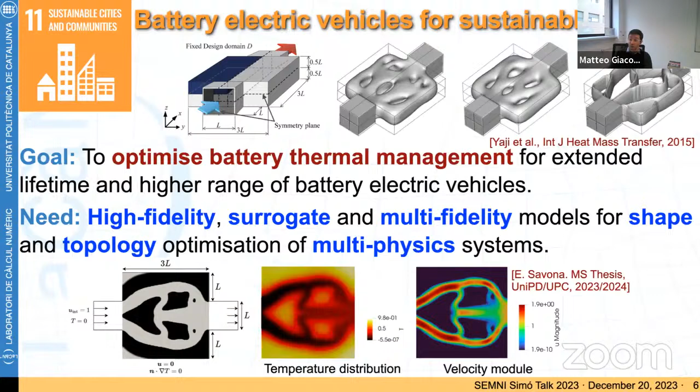The other problem that I mentioned earlier, related to extreme events, has in mind Sustainable Development Goal number 6 about clean water and sanitation. In presence of extreme events like floods and hurricanes, the critical infrastructure that we use in our daily life, like pipelines or sewage systems, can be critically affected. So in those cases, how can we provide feasible, deployable manners to have access to clean and safe water? To do this, what we can deploy are filtration systems or microfiltration systems. The key aspect of these systems is that they need to be easily transportable. They need to be efficient in terms of energy consumption.

And so they have a lot of restrictions that make these devices not something that can be simply set down in a certain place; we need to be able to move them easily. So it's critical in this context to devise digital twins of these membrane filtration systems to perform optimization, again, shape optimization and topology optimization, but also control in real time of these devices.

And the challenges in this context are the fact that the underlying physics is represented by coupled systems, Navier-Stokes, porous media, and so on and so forth. And there we need effective domain decomposition techniques that are also able to treat not only the high fidelity simulation, but also the local surrogate models that are constructed in each subdomain. And this is what we started looking into with the group in Loughborough recently.

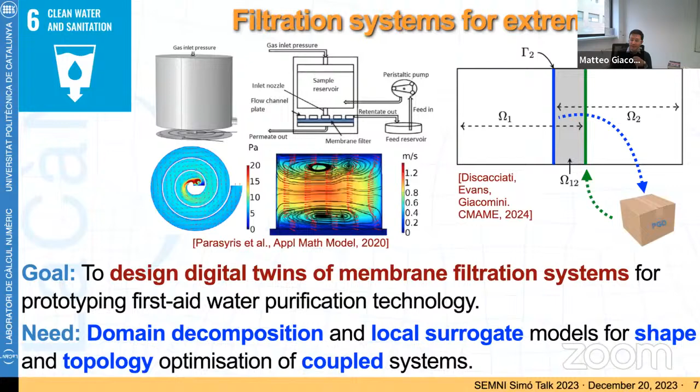So these are the two main motivations of all the work that I'm going to present today. But for the sake of simplicity, I will try to stick to a bit more abstract framework and talk about structure optimization henceforth. So what is topology optimization in a nutshell? Here you see the abstract mathematical formulation of the method.

The idea is that we want to determine the layout of the domain. By the layout, we mean the material distribution that we have in this big box. This material distribution needs to meet a certain criterion. So we want to minimize a certain cost functional represented in blue over here. And this cost functional, of course, depends on the shape of the domain, but it can also depend on some physical variables, for example, this U. And this physical variable U, generally speaking, is the solution of a certain PDE.

In this context, we are going to consider the linear elasticity equation. So this will be the standard linear elastic problem. But this is not all. We also need to introduce additional constraints, which are geometric constraints. Okay. This result here to the right is the compliance minimization of a bridge in which we are applying a vertical load in this position.

Okay, so what are the computational challenges in this context? Well, as I mentioned earlier, this objective functional depends upon the solution of a PDE. So we need to solve a PDE multiple times using finite elements. Moreover, these problems are generally ill-posed in the sense that there exists no unique minimizer. There are multiple minimizers, for which we need to introduce geometric constraints, which could be constraints over the volume, constraints over the perimeter.

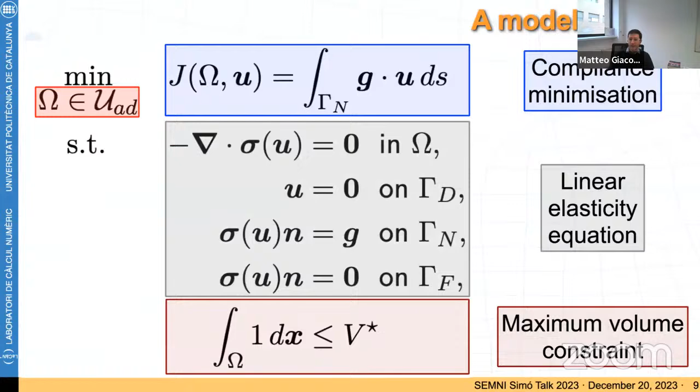Okay. So in the literature, there have been many ways of approximating this problem. And what I want to start with is briefly reviewing the homogenization method. The idea of homogenization goes back to the work of Bendsøe and Kikuchi, and was later formalized mathematically by Allaire. The idea of topology optimization by homogenization is to define a composite material. This composite material is characterized by two variables, a material density theta, and what is called a homogenized tensor C star. So we can rewrite our original compliance minimization problem using the homogenization method by employing these two variables, the material density and the homogenized tensor.

So what is critical is to rewrite all the functionals and all the variables that are appearing in this problem in terms of theta and C star. Of course, in terms of the constraint over the domain, it's straightforward to see that basically it boils down to rewriting the integral only accounting for theta. Theta is a variable that is equal to 0 in the void and equal to 1 in the material.

Okay. We can rewrite the compliance using the dual complementary energy principle in terms of the Cauchy stress tensor and the homogenized tensor C star. And what is most important, we need to determine a constitutive law to express the stress tensor as a function of the displacement using the homogenized tensor. So in this framework, what we basically have done is determining a way to express this domain omega in terms of these two parameters, theta and C star.

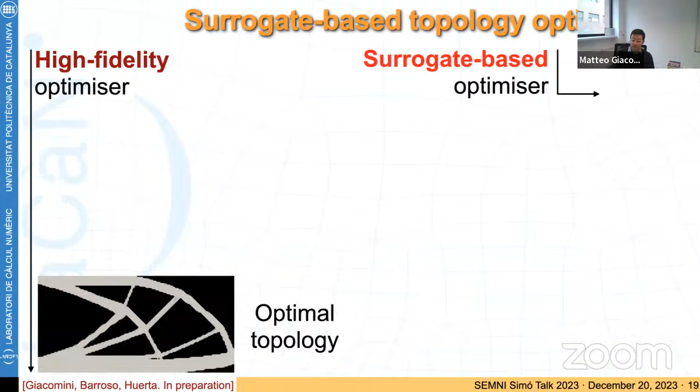So using this, instead of solving the entire high fidelity optimization loop, to provide a surrogate-based initialization to the algorithm, we can retrieve an optimal topology, which is indeed much more reasonable in terms of its mechanical configuration, and also the major features from the high fidelity solution to the left and the surrogate-based optimization to the right are actually well captured.

If you look more quantitatively to the compliance and the volume, we see that there's approximately an error of 10% with respect to the high fidelity solution. But again, this should not be particularly surprising because we are actually using a reduced model to solve the optimization problem. And it's well known that this model tends to provide suboptimal configurations.

But what's really interesting is observing the computational cost of this problem. The left configuration needed 10 iterations to get to a composite optimal structure and 51 with penalization. Whereas to the right, we only perform 1 iteration to get to a reasonable composite structure and 14 penalization iterations.

Indeed, we could also improve these results because this first iteration is not really needed. We could perform some smoothing or some post-processing of the output of the neural network and further reduce the computational cost. So using surrogate-based models for quasi-optimal topologies indeed provides a significant advantage in the first block of the optimization loop that I mentioned at the beginning of my presentation.

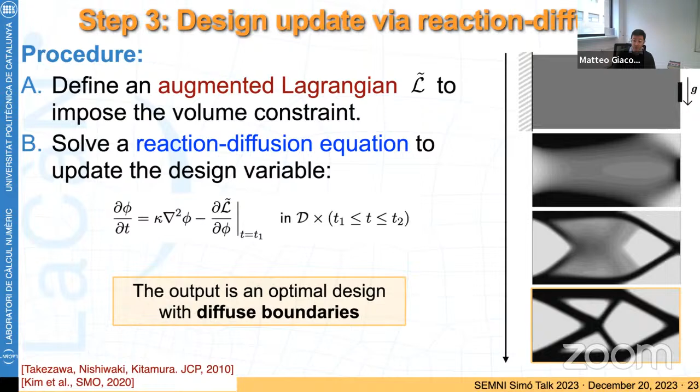So by running this reaction diffusion equation, what we end up having is this configuration at the bottom right, which looks like an optimized cantilever beam, but it's kind of blurred. So the optimal design has these diffuse boundaries. So at this point, we need to penalize these intermediate configurations, and to do so, we introduce the notion of double well potential, again following the work by Nishiwaki and co-workers.

And so we define a new potential calligraphic F, which is basically a combination of the sensitivities that we mentioned earlier and a double well functional, which has two minima, one associated with phi equals 0, so void, and one associated with phi equal 1, so material. And the intermediate configurations are then penalized.

So to perform this algorithm here, this evolution to the right, what we need to solve is a modified reaction diffusion equation, in which we still have the fictitious time and the Laplacian as before, but we are now replacing the sensitivities that we introduced earlier by the derivative of this double well potential. And this allows us to achieve an optimal design configuration with sharp boundaries.

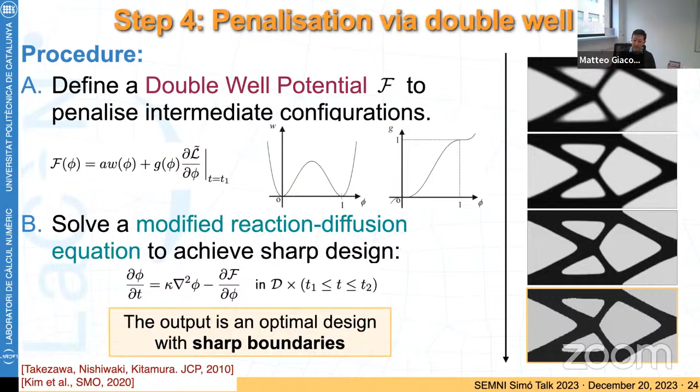But we are not happy yet, because if we look a bit closely, the one on the right is what we would like to get, but what we do get from the algorithm is this jagged representation, which clearly is influenced by the underlying mesh that has been used for computation. Of course, to get arbitrarily smooth boundaries, we could resort to using a very fine mesh. This is computationally very expensive, and so what we want to do is perform mesh adaptation.

How so? Well, we basically noticed that the high resolution regions are associated with the transition between material and void, or material and material, material and fluid, depending on the problem that you want to study. And these transitions are associated with large variation of the phase field variable, so with large values of the gradient of the phase field variable. So the gradient of the phase field variable allows to determine the location of the mesh elements to be refined, but also the target size, shape, and orientation of these elements.

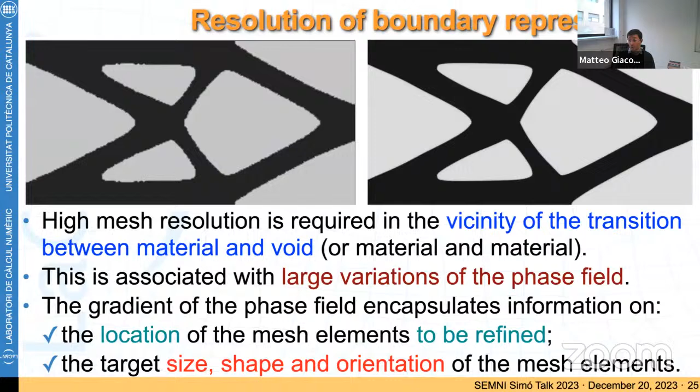And indeed, to do so, we construct an anisotropic mesh adaptation strategy following the work by Micheletti and Perotto, and later we've extended it also to the context of more sharp representation via level set in this paper. The idea is to devise a reconstruction of the gradient, which is performed patchwise by performing a weighted average of the gradient of our finite element approximation of the phase field variable on the patch that comprises all the triangles that share either a vertex or a face with the triangle K.

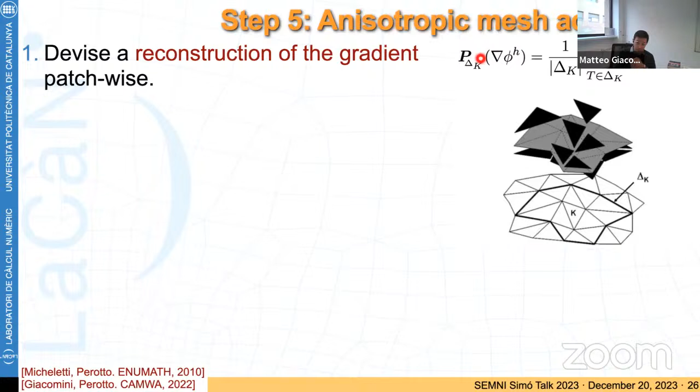Once we've constructed this reconstructed gradient, we can follow the idea by Zienkiewicz and Zhu to devise an indicator to perform locally mesh adaptation, so a recovery-based indicator. What is critical in order to select not only the local mesh size, but also the shape and the orientation of this element is to determine an anisotropic version of this estimator.

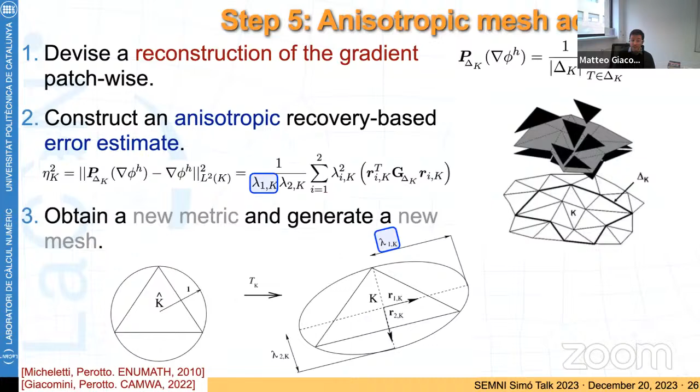So basically rewriting this estimator in terms of lambda 1 and lambda 2, which represent the semi-axes of the ellipse that circumscribes the generic triangle K, and the eigenvectors R1 and R2, which are associated with the two directions of these semi-axes. So by controlling not only the mesh size H in the element K, but specifically lambda 1, lambda 2, and R1 and R2, we are able to appropriately orient the elements and stretch them as needed.

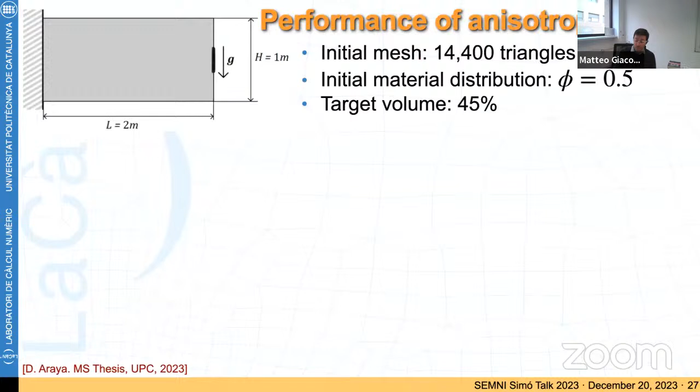So how does this work from the practical viewpoint? Let me show this example again of a cantilever beam. We start with a mesh of 14,400 triangles with an initial material distribution phi equal 0.5 and a target volume of 45%. So we perform phase field topology optimization using isotropic meshes or anisotropic meshes. With eyeball norm, you can see that we can get similar results between these two approaches.

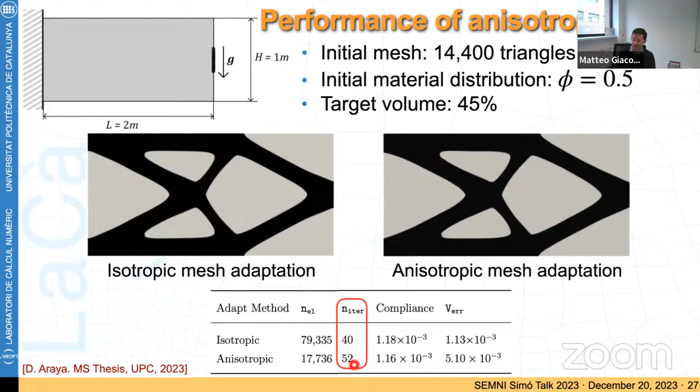And quantitatively speaking, if you look at the value of the compliance and the error on the target volume, they're all of the same order and within a range of acceptability. In terms of number of iterations, they are almost comparable. In the case of the anisotropic meshes, we need to perform slightly more iterations. But what is critical to observe is that the underlying meshes are way coarser in the case of anisotropic elements. So although we need to perform, in this case, 12 more iterations, each iteration is less expensive from the computational viewpoint.

So we do know now how to construct quasi-optimal topologies and how to improve the quality of the meshes. But this we can do for a specific set of parameters. So for one configuration, for one run of the high fidelity optimizer.

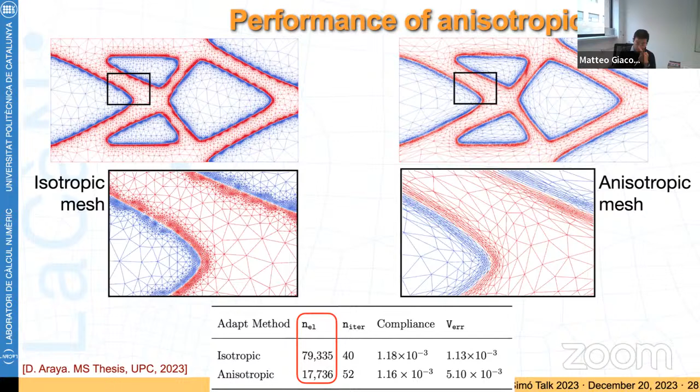So the last topic that I want to present is trying to couple the two approaches by generating not only quasi-optimal topologies, but quasi-optimal adapted meshes. So can we do mesh adaptation through neural networks? And this is the work of the master thesis of George Zamberlan.

And the idea is, in the framework that I've just presented of phase field topology optimization, to train, in this context now, a graph neural network to extract the most relevant features from a data set of adaptive metrics that are obtained with the algorithm that I mentioned earlier. So we now preserve the first block of the algorithm. We are not touching it, but we are employing, instead of a mesh adaptation procedure, which might be expensive, a graph neural network to predict the mesh.

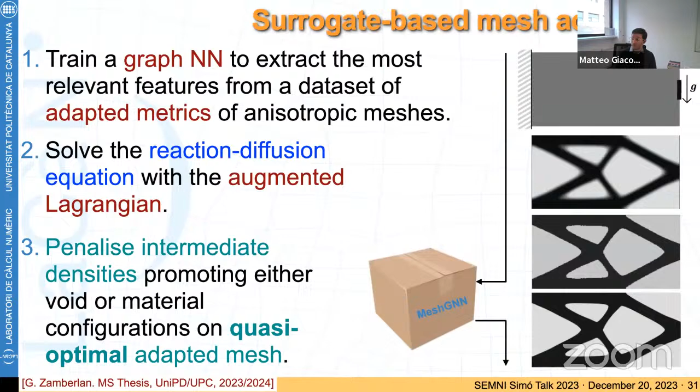So we still solve the reaction diffusion equation with the augmented Lagrangian. That part isn't touched, but now we modify the penalization term of the intermediate density in order to rely on these quasi-optimal meshes. How does this graph neural network work?

First of all, contrary to what I presented earlier, which was a feed-forward network and a decoder, here we're working with a graph neural network. So we can exploit the connectivity information related to the finite element mesh in this context. So the input is represented by a metric of an anisotropically adapted mesh.

We have a graph autoencoder in which we compress the information towards a latent graph, and there's a bunch of technicalities that I don't have time to enter in. We do graph augmentation, convolutional layer, top K pooling, and so on and so forth. And we reconstruct a metric as an output of the neural network. And again, we actually tested different configurations.

What I want to present is a configuration in which we actually train 4 graph neural networks, one for the components M11 and M22 of the metric, one for the absolute value of the component M12, and another one for the sign of M12. M12 is responsible for the stretching of the elements. So it's very important that not only we capture the magnitude of the stretching, but also the direction in which we are stretching in order to retrieve good results.

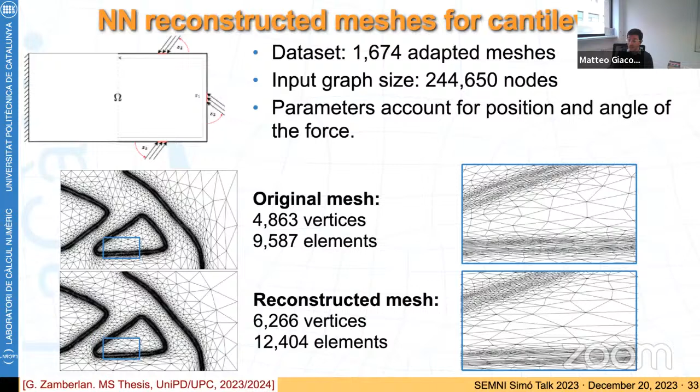So I presented first a way to improve topology optimization by means of quasi-optimal topologies trained by neural networks, a way of improving the boundary representation, and finally a way of improving the computational cost of this boundary representation by quasi-optimal meshes. So let me briefly wrap up everything.